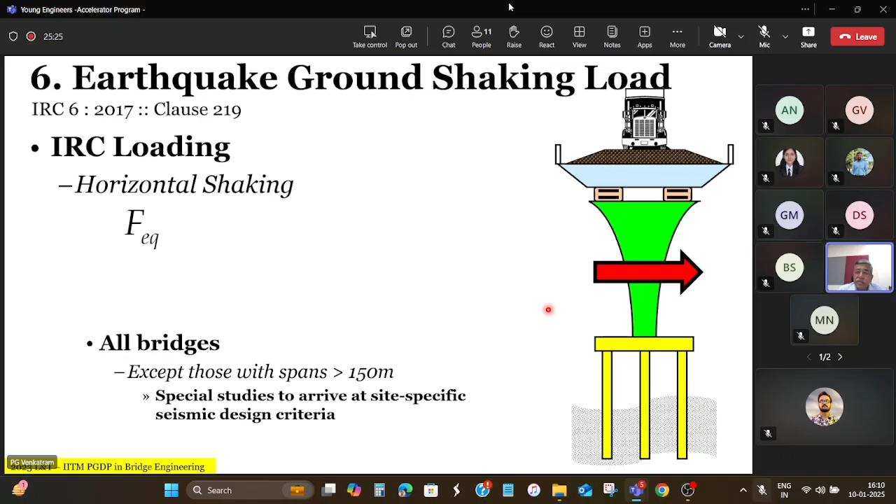I mean the relative displacement between the inertial mass of the superstructure and the foundation. It is through a structural member called the foundation, substructure, bearing, and sometimes partly superstructure itself. That whole structural member is subjected to relative displacements, and when you have relative displacement, forces will start appearing. That force is what we have decided to call FEQ.

All right, so our whole process today, as of date, stands at determining this FEQ, and we do that in a simplified fashion of calculating a horizontal acceleration coefficient or horizontal acceleration value, and we multiply it with the inertial masses, which is primarily dead load, and sometimes part of the live load.

Now, the design seismic coefficient is given by the expression Z by 2 into SA by G into I by R, in whichever form we want to combine these quantities. Z by 2 represents the design peak ground acceleration, Z represents the peak ground acceleration. I represents the importance factor for the structure. SA by G corresponds to the single degree of freedom design acceleration spectrum response value for a particular time period, the fundamental period of the structure, and R represents the response reduction factor.

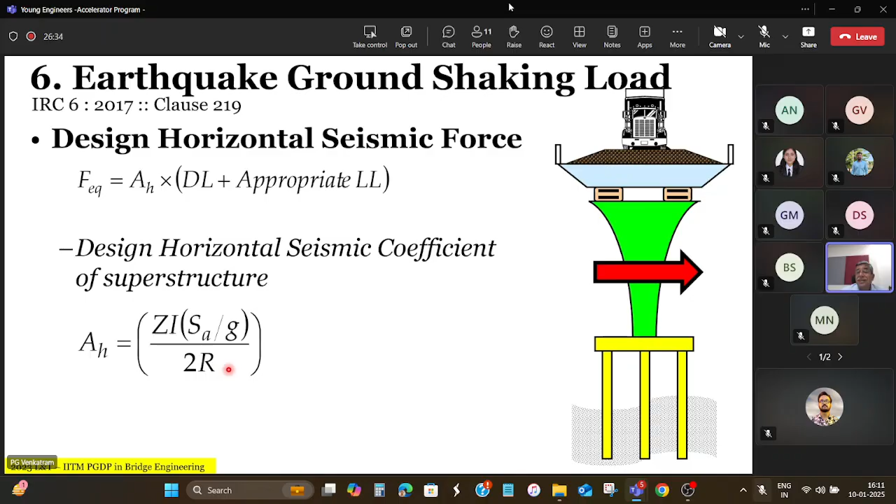We'll understand the significance a little later. What do each one of these practically mean? So the first part, let's understand the zone.

The zones or the seismic zonation basically represent the peak ground acceleration values, from zone 2 to zone 5. Earlier there used to be zone 1 to zone 5, but now zone 1 has been merged and combined into zone 2, so now we have 4 zones.

Rest assured, there's a draft version of IRC IS 1893 out in circulation for public consultation, which is changing it from zone 2 to 5, to zone 2 to 6. So there will be a zone 6, and primarily most of the changes are occurring where zone 5 is divided into 2 parts, and zone 6 is going to have a peak ground acceleration of 0.76.

76% of the inertial mass will be the horizontal force in those, and that will primarily consist of most of this Himalayan belt. I will not talk about it now, but you can locate it in the draft of 1893 under circulation for public consultation. Basically, this zone represents the peak ground acceleration as a fraction of acceleration due to gravity in the horizontal direction for a single degree of freedom system, assuming 5% as the damping.

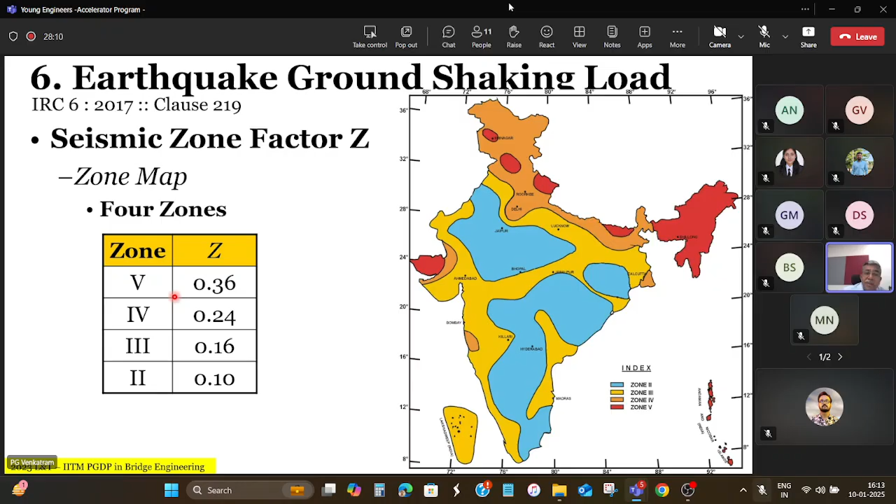Some definition is seen in the code, but the fundamental philosophy is that critical bridges are essential, very important, and therefore cannot be lost during an earthquake event — they should suffer minimal damage in the design earthquake. What this means is, imagine there is a particular region...

Say something like Delhi, which is currently classified under zone 4. In Delhi itself, you can have bridges classified as normal, important, or critical — all three are possible. They will all have the same zone factor, but the design forces for each of these structures will be different.

Normal means it can suffer significant damage. Important means it can suffer some damage. Critical means it can suffer minimal damage. Nevertheless, damage will occur in all of them. The whole idea in the design criteria is that there is no collapse, but it's the level of damage under the design earthquake that is controlled by this importance factor.

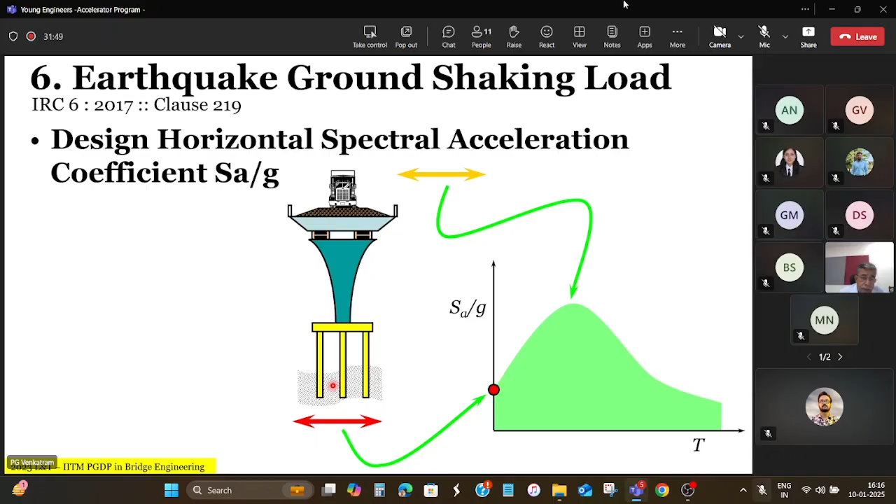Quite often in the current stage of designs, most of the time we ignore the soil, but if we do include the soil, it alters the picture dramatically. Excluding the soil, we do the modeling of the spring and come back to this value of K. In case there is significant damping, we introduce a damping model as a part — along with the stiffness, you have a damper.

What you see here is that between 30 and 60 seconds from the initiation of ground tremors, you had the peak acceleration, with acceleration peaking at as much as 0.98g. This is the ground acceleration felt at the recording station. A second recording at a different location, for the same 30 to 60 second period, had a 0.78 recording.

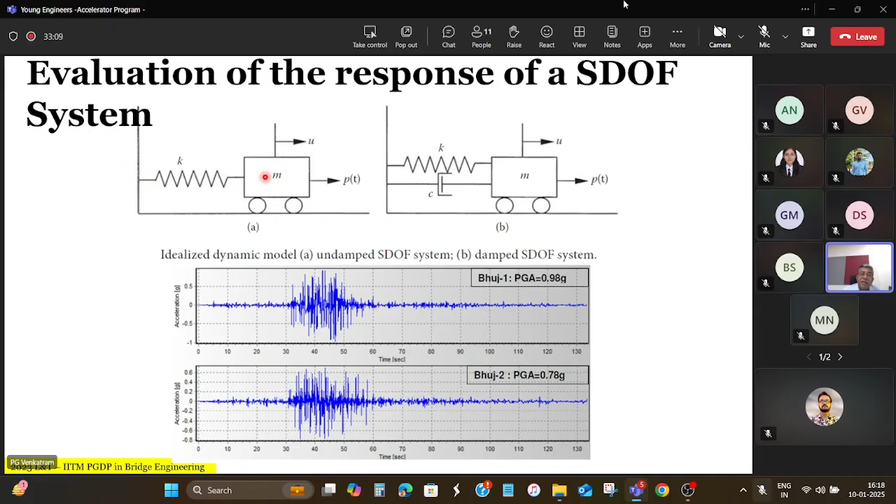So multiple earthquakes, when they happen, have multiple records. These accelerograms are put as input to the system, and we find out the acceleration response on the mass m, and then we generate what is called the displacement response spectrum, velocity response spectrum, and acceleration response spectrum.

All of them have a certain common characteristic, which is that all of them have a zone of concentrated peak acceleration. Normally we say this is how it will look, but the design value will be shown something like this, primarily because we eliminate the local peaks. If you eliminate the local peak, there's always a zone of constant acceleration response, a zone of constant velocity response, and a zone of constant displacement response. Eliminating the peaks, please understand, is important.

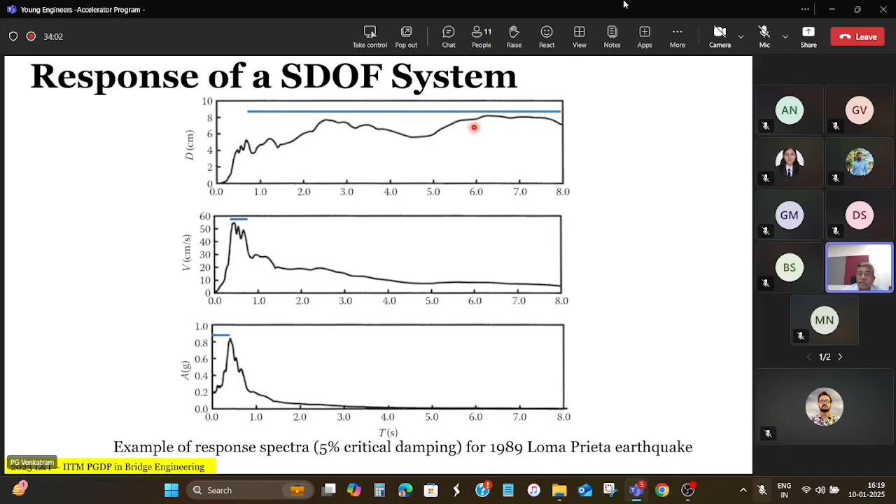So why do we do that? We basically do that because the real spectrum will be irregular in shape, because it is more or less linked to the irregularity in the appearance of the natural ground acceleration. That is, the ground acceleration is not a regular shape. It's constantly varying in fractions of a second.

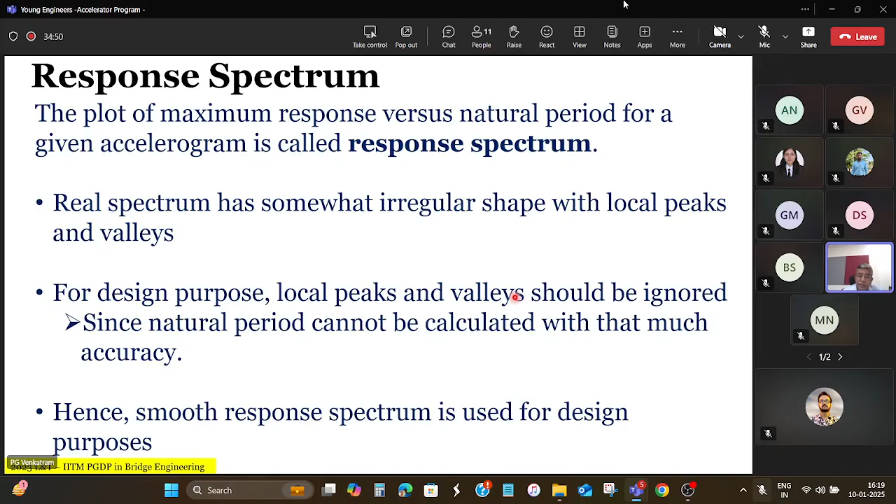And because in all these computations that we do, certain material properties and certain geometric properties are all approximate, using an approximate value and calculating the precise peaks for design purposes is a pointless exercise. Therefore, since the natural period cannot be calculated with great accuracy, we ignore the local peaks and valleys, and hence a smooth design spectrum is used for design, and that is where finally it comes to this kind of a picture.

If you go have a look at the Eurocode, you will see it. So let me see if I can share quickly with you the shape of the curve as it is defined in the Eurocode. Let me just see quickly. I think I have somewhere here on the...

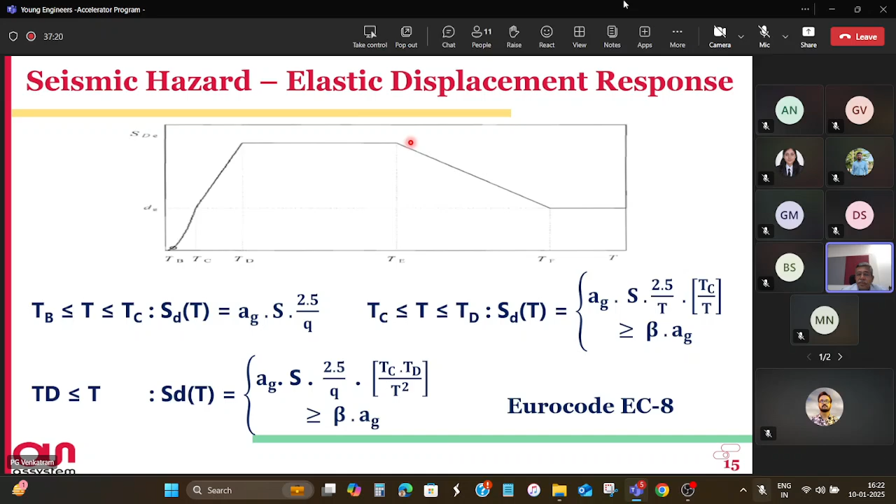Basically, it's nothing but if you do the integration of this curve, which is time constant. So if you do the second integration, if you integrate acceleration twice with respect to time, you will get displacement. And this is the constant velocity. If you recall your definition, it is proportional to 1 by t. So if you integrate it once, you will get the velocity spectrum. So you integrate 1 by t once, you get a constant value, so this becomes the spectrum of constant velocity.

And this curve, if you take a look at Eurocode, is proportional to 1 by t square. So if you take the second integral of acceleration, you will get displacement, so this becomes the zone of constant displacement. So it is possible to derive. We have decided in India, we are not yet interested in the acceleration and velocity and displacement, because we have not yet formulated our design specification for that yet, but we will get there.

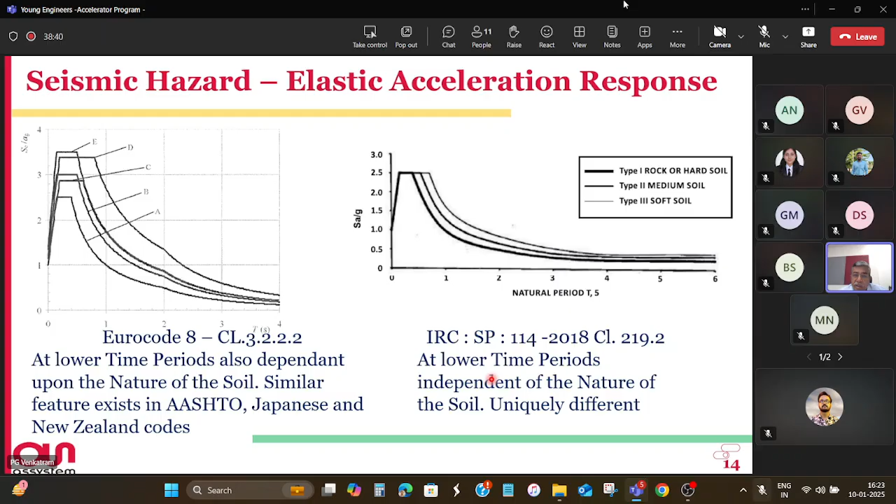Now that we have a new zone map definition, all the magnification has taken place. You will find that design is going to be more difficult with the new code in place. IRC will also have to change with that, so IRC will undergo a lot of changes once that new 1893 is published. I'm just introducing what are the changes that are likely to come. The pattern itself will change, and with that you will also have a different kind of design approach that may have to be learned and adopted.

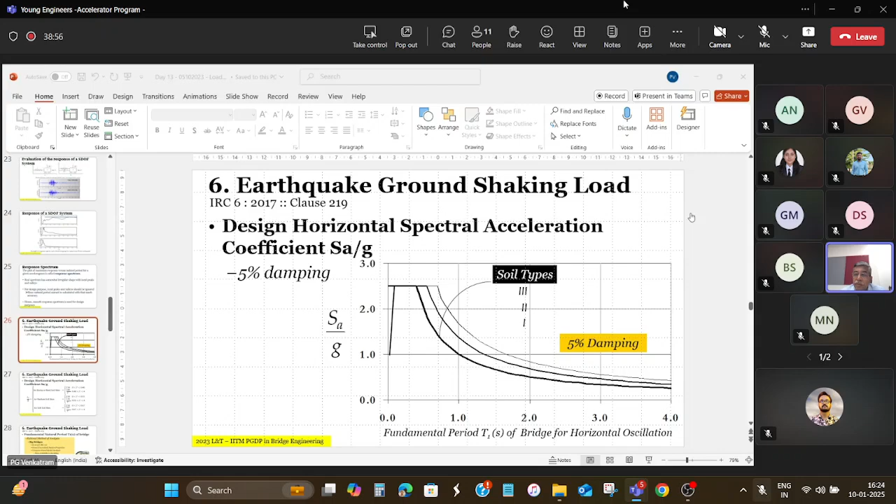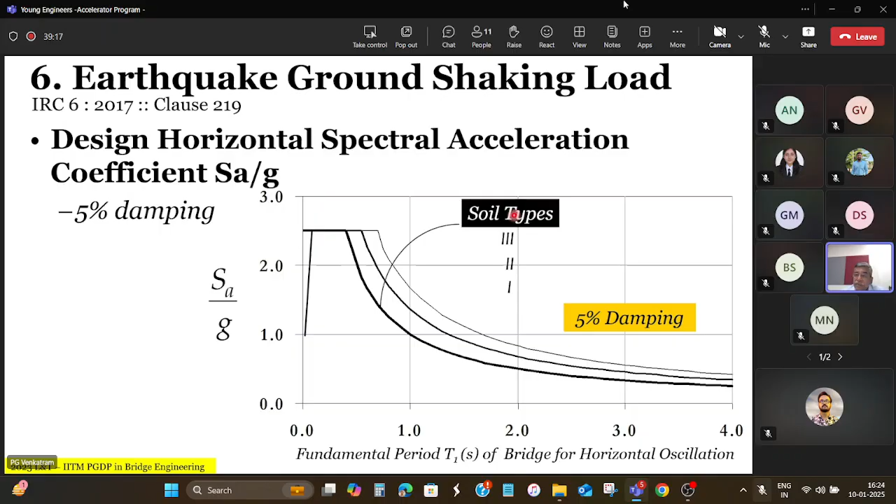Coming back to our basic understanding of the seismic displacement loading, we need this parameter, and for this we have this fundamental. If you notice, irrespective of the soil type, the peak acceleration is constant. If you recall the Eurocode, even the peak is different for different soil types. Then, if you look at the graph for the constant acceleration zone, SA by G is constant at 2.5 for all soil types.

After that, the acceleration spectrum is proportional to 1 by T. So if you integrate acceleration, what do you get? You get velocity. So if you integrate the second part of the curve, you get a constant velocity spectrum, and if you do the second integration, you get a linear one with respect to time. So the displacement spectrum will be linear in this zone.

According to current IRC, the displacement spectrum goes on increasing to infinity, which is not really the case. All the systems that we have studied and analyzed demonstrate reaching a constant. So this graph will also get changed, this definition will also change, and we will have a definition of constant displacement. The constant displacement is actually defined indirectly in our code in IRC SP 114. I will not talk about it since we are not dealing with learning in depth about earthquake design. We will look at and understand the phenomena, and be aware that these are the issues you must be aware of in time to come.

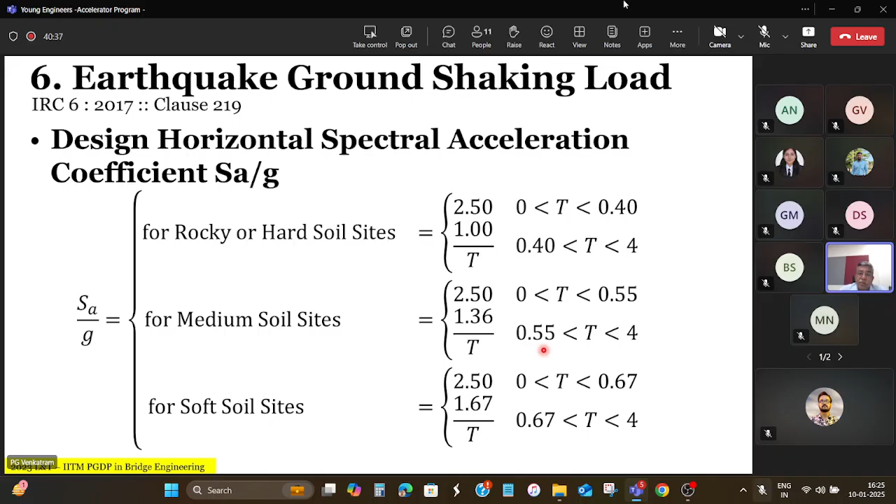After you have the fundamental natural period, that is the first period of the bridge, you can use any of the rational methods, or for small bridges, use the simple equivalent static method, which is suitable for small displacements, stiff bridges, etc. You calculate the modulus of elasticity as per concrete, use the cross section properties, and use computer based modal analysis, mass and stiffness modeling. These are all the various rational methods of analysis that we are allowed to do according to the code to arrive at the FEQ.

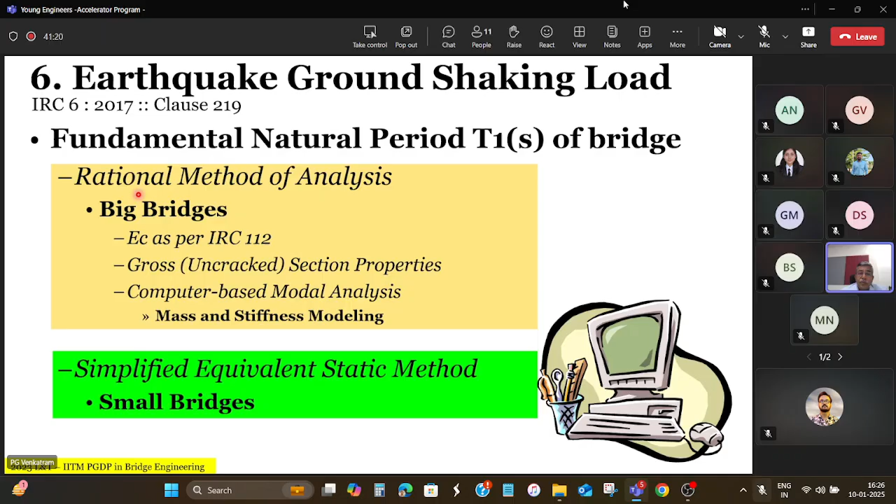Right, so after you have that, there's also a simplified equivalent static method, which is time equal to time period, first mode, equal to 2 into square root of d by 1000f, where d is the appropriate dead load in kilonewtons, and f is the force per unit displacement, that is the force required to produce 1 mm of horizontal displacement.

So if you do any static methodology to calculate this, you have a simple way of calculating this time period, and you can actually derive it from the fundamentals of structural dynamics. It's very simple, maybe sometime else, or maybe later in the slide, I may show you how this is arrived at. But remember, this is a simple method, primarily useful whenever you're using the equivalent static method. It is not suitable for any modal method or any more complex ways of analyzing the FEQ.

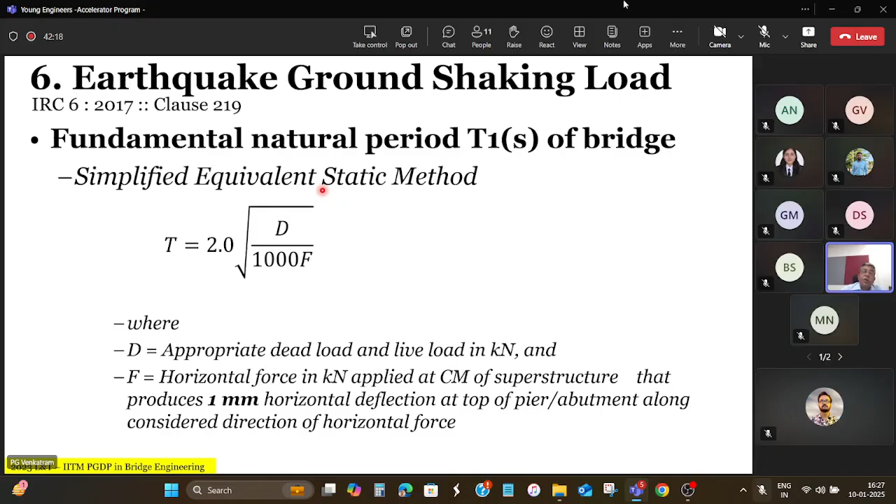The same thing, if you take a look at it in the longitudinal direction, say you have a pinned and a roller one.

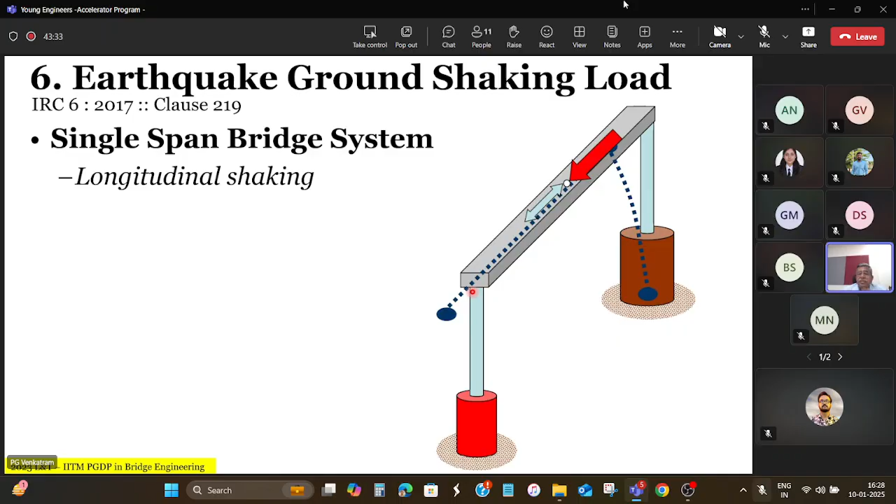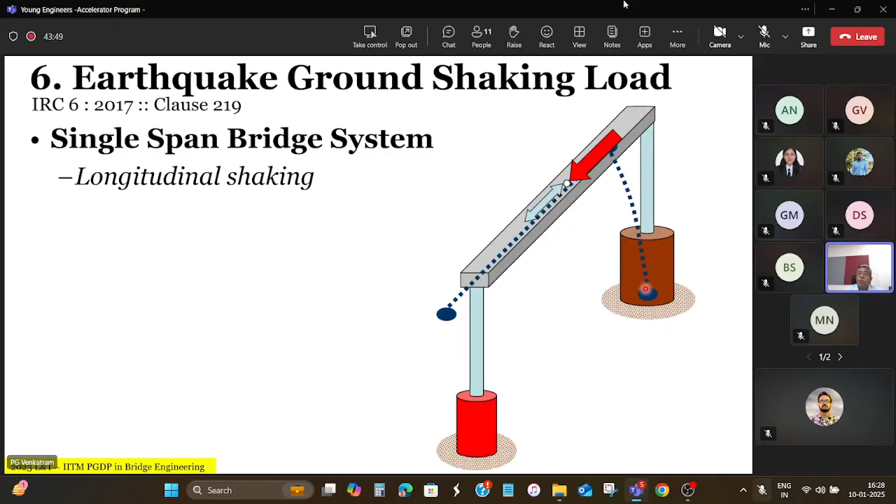When you do that, what happens is the displacement takes place in one direction, the mass moves, and all the forces appear on the so-called fixed end, and the free end will see some force primarily due to the friction at one limit, or alternatively due to the distributed mass of the substructure itself, it will see some amount of seismic response as a distributed mass. But essentially the lumped mass of the superstructure will have its inertia connected to one pier, which, as you can see here, is the pinned support.

Now, the fundamental period for equivalent static method - you go back to structural dynamics, it's simple, square root of k by m, right? And time period will be derived from that as 2 pi into square root of m by k, if this is the frequency. And then mass you substitute by weight divided by g.

And this 2 pi term, if you take a look at it divided by square root of G - a pi divided by square root of G will be approximately 1. If you recall, G is 9.807, you take the square root of that, it will be about 3.1 or so. Pi is also 3.1. They cancel out, so it simplifies into 2 into square root of D by 1000 F.

Here the units are important, don't forget the units. The time period is always in seconds, but the D has to be self-weight, not mass, because we have incorporated the acceleration due to gravity into it, and that has cancelled out this pi. And the force, since this is in force units, this is also force per unit displacement. So it has to be applied in the magnitude in terms of kilonewton per millimeter, not ton per millimeter, not kg per millimeter, but kilonewton per millimeter. That's how you have to determine it.

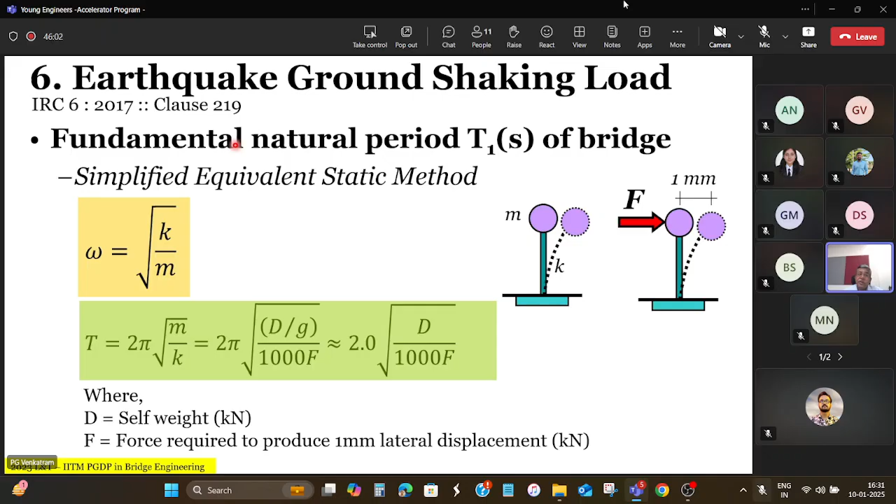Basically, using any software, you apply a force that is required, evaluate the displacement, and therefore calculate force per unit displacement. Any other mechanism is good enough for you to determine the F, and mass is known to you. So this procedure is a simple way of calculating the equivalent static method.

After having determined the FEQ, we have different components, and the different components are designed for different values of forces. So what are the forces? What are the structures we need to design? We need to design substructure, foundation, bearing, and superstructure.

Now the question comes, the response reduction factor that you see in the code is primarily to tell you where do you want to accommodate - remember, what is the problem statement for us? The problem statement is how to accommodate the relative displacement between the ground and the superstructure. So what are the components that can accommodate this relative displacement?

Which are the components? Superstructure is quite rigid. Foundation - so now comes the question, which one of them should accommodate the maximum relative deformation?

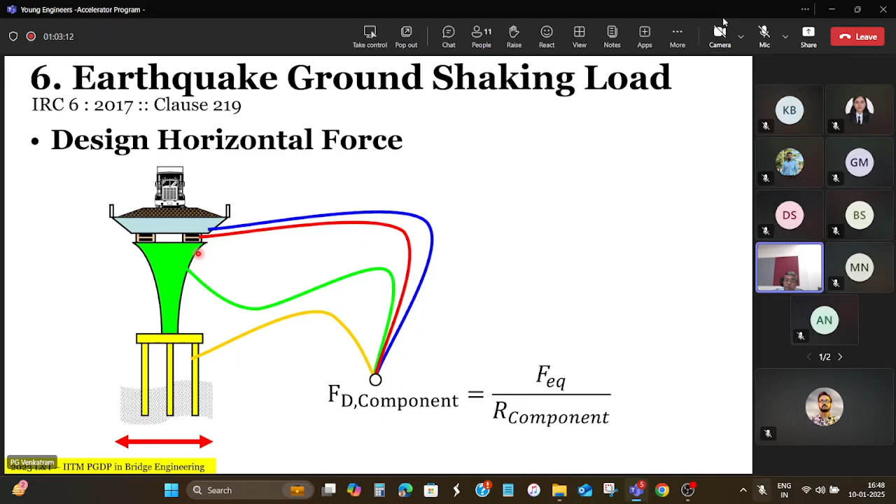So that is where there is a response reduction component by component. You will have a different response reduction. And if you take a look at IRC code, you have all these various response reduction factors depending upon the nature of the material or the type of structural arrangement. And if you notice, for all bearings and connections, it is always 1.

Okay, please understand one thing - this applies to bearing and connection in all cases, irrespective of whether you have a plastic hinge formation in the pier or whether you are using an isolation bearing type which accommodates deformation by itself. Either way, the response reduction factor is 1.

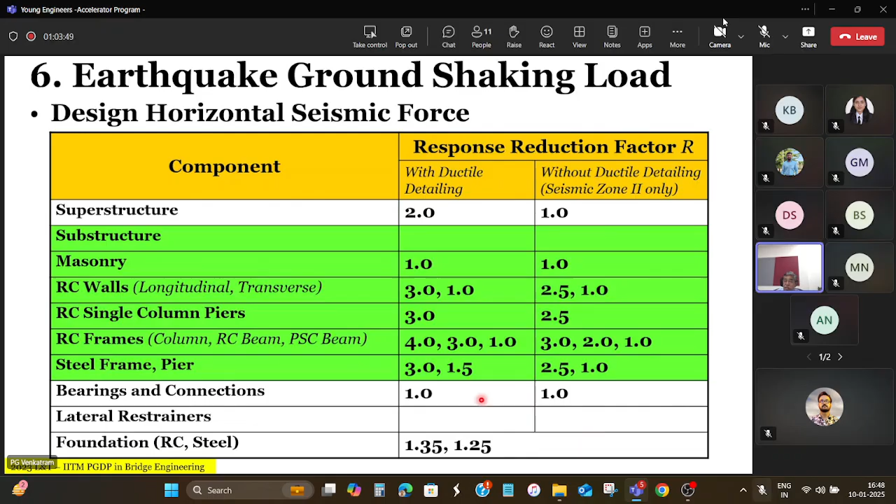Now, in the bridge design, we design for earthquake all bridges in zone 4 and 5. But in zone 4, we leave out culverts and minor bridges up to 10 meters - we don't design them for earthquake. This is one way of saying don't put the onerous conditions of earthquake design on such small structures, which can see significant damage.

But in zone 3 and 2, the exemption category is different. For culverts and minor bridges, they're definitely there, but for spans less than 15 meters and total bridge length less than 60 meters in zone 3 and 2 also, you don't need to do seismic design.

You do it for longer spans only, because these structures will be so many in number that if you start putting this onerous condition, things might become expensive and difficult. So that's a cost-benefit trade-off.

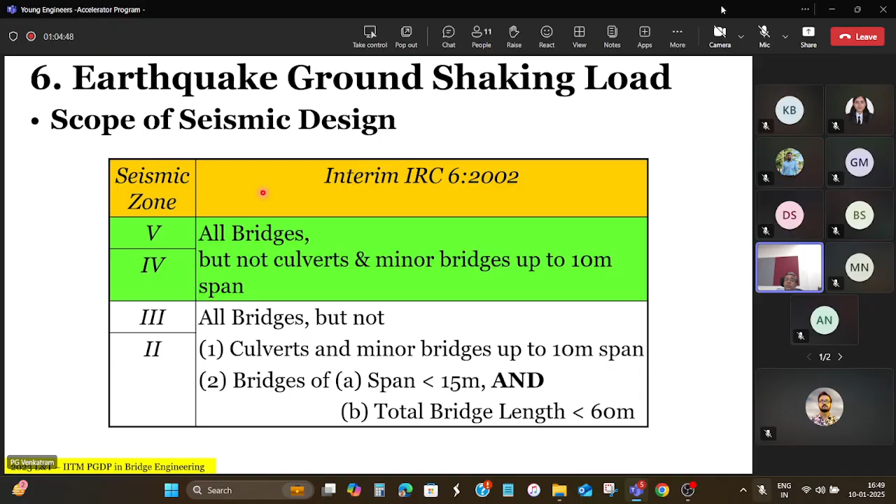Now we have seen this so far as ground shaking in the horizontal direction. However, earthquake accelerations are in all three directions, X, Y, and Z. But when it comes to the Z direction, this acceleration is transmitted through the substructure.

Superstructure has a distributed load and its own inertia. We have a simple formulation which says the design seismic vertical coefficient is taken as 2/3 of the design horizontal seismic coefficient. But remember, when you do this, the time period you take is that due to the vertical stiffness of the deck, not the lateral stiffness. Don't confuse that. The time period will be that of a beam bending in that direction, not a free cantilever as in the case of a pier. So you have to be very careful about what you understand.

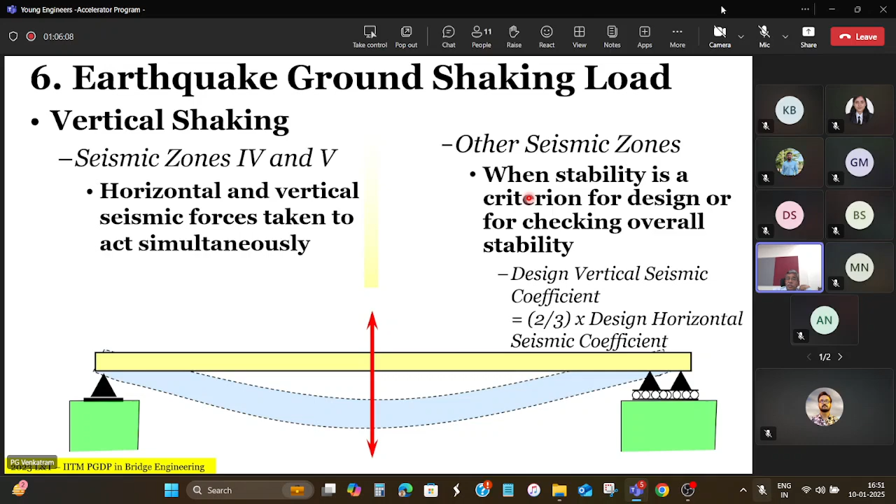With that natural period and the response spectrum, you calculate the value and take 2/3 of it for the seismic vertical coefficient, combining it with forces in the other direction for simultaneous occurrence of the multi-directional earthquake. Now we have been seeing this all from the force point of view.

One part is primarily the displacement part, but for design strength purposes, we convert it into an equivalent force and design for it. However, we cannot ignore the displacement part, which is the primary component, and it is catered for currently. If you understand, all our codes are currently written on force-based design. So the displacement aspect is addressed differently. It is not that we have ignored it in our codes, but the displacement aspect is considered in the following fashion.

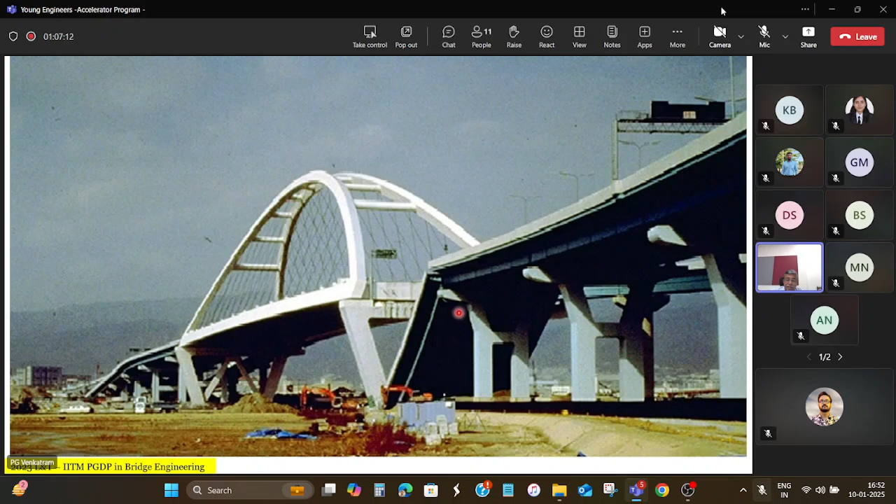So one way to arrest the displacement is to provide an anti-dislodgement device. That's not the only way. What does the code do? The code prevents dislodgement by having a seating width requirement.

This seating width requirement in our code has been reproduced from AASHTO, with its background derived from it. Basically, this is an articulation half joint. You may not see much of it, but in certain circumstances people still use this half joint. So you have one superstructure and another support or extended pier, with two different spans sitting on each other. What should be the overlapping length, n?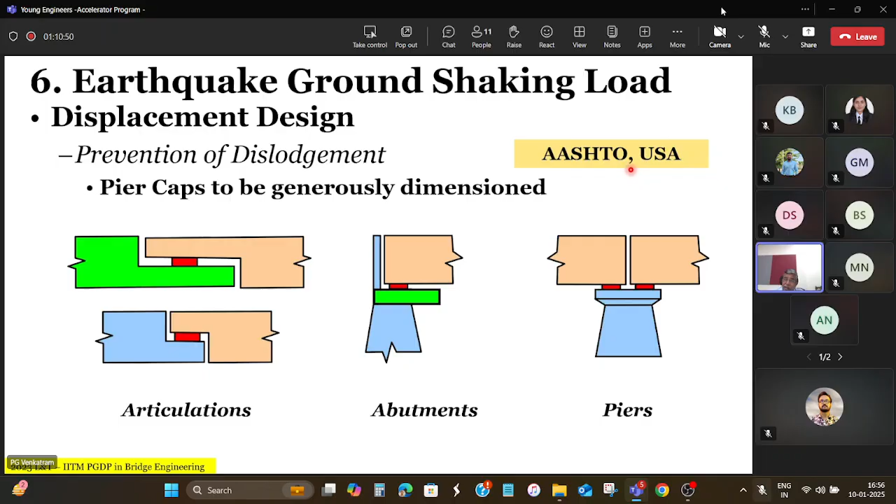This solution is also acceptable in terms of preventing displacement. Now the question comes - if you have ever read different codes, AASHTO doesn't have any prescription for anti-dislodgement arrangement. It doesn't have. It however has this prescription for the minimum seating width.

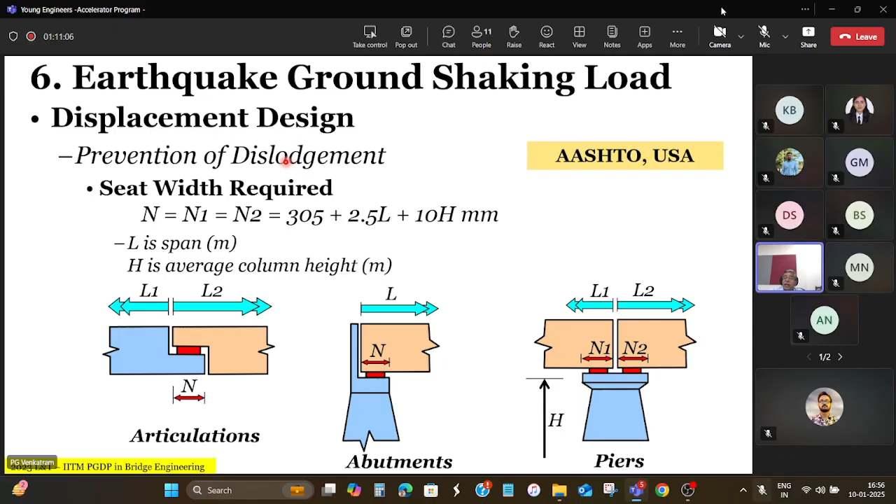What does our code do? Our code not only reproduces this seating width, in zone 4 and 5 it also wants an anti-dislodgement device, somewhat similar to this. So our code has - maybe it is the case of once bitten, multiple times shy. They have seen earthquakes in which nothing has happened to the substructure, nothing has happened to the superstructure, except that the superstructure is lying on the ground.

So therefore, they said dislodgement is a bigger phenomenon in high seismic zones, so it has to be catered for more seriously by seismic arrangement.

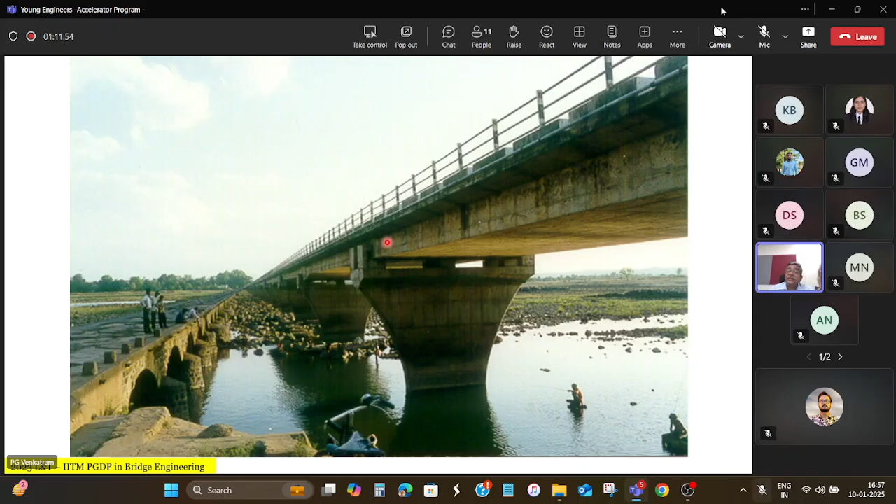So we have 2-3 things to satisfy in our code. We have to satisfy the force strength base, because we are all strength-based design. We have to satisfy the seating width requirement, which is essentially to prevent displacement-based failure. In addition, in zone 4 and 5, we have to have an additional stopper arrangement in both the longitudinal and transverse direction.

So how do we do that? We have what is called a seismic reaction block. Imagine in a longitudinal direction you have a multi-span continuous structure. It need not be structurally continuous, but for longitudinal displacement, imagine that it is continuous. And in the transverse direction, there will be restraint at every pier. So this is the normal operational condition.

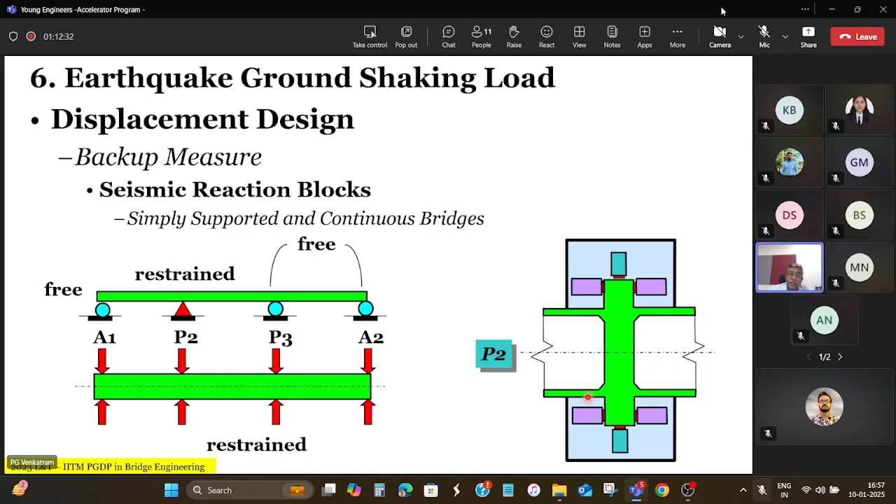Now, what backup measures do we need? We need to make sure we have an anti-dislodgement device. How do we achieve it? On the fixed pier, you introduce these purple-like stoppers, which essentially prevent the longitudinal displacement.

And in the transverse direction, you introduce this dark blue kind of arrangement in the fixed pier, so that it prevents the transverse displacement, in spite of the fact that your bearing articulation might already be preventing that. So in zone 4 and 5, you need to make this additional provision.

And if you take a look at the other piers, the so-called free piers, they don't have the longitudinal stoppers. They only have the transverse stoppers, in addition to whatever provisions you have made in the bearing.

This is the case for zone 4 and 5. In zones 1, 2, and 3, you may - I don't remember exactly, maybe zone 3 also requires you to provide this. I don't recall, but you can refer to IRC 114, SP 114, it will tell you whether zone 4 or 3 also requires you to have this additional stopper.

So this is how we take care of it - see, our basic phenomenon is displacement, but we design for force. The displacement phenomenon we have not ignored. We have not given any design rules for how to handle the displacement in our code, but we have given detailing rules on how to prevent the adverse effect of significant displacement, in the form of seating dimension and provision of

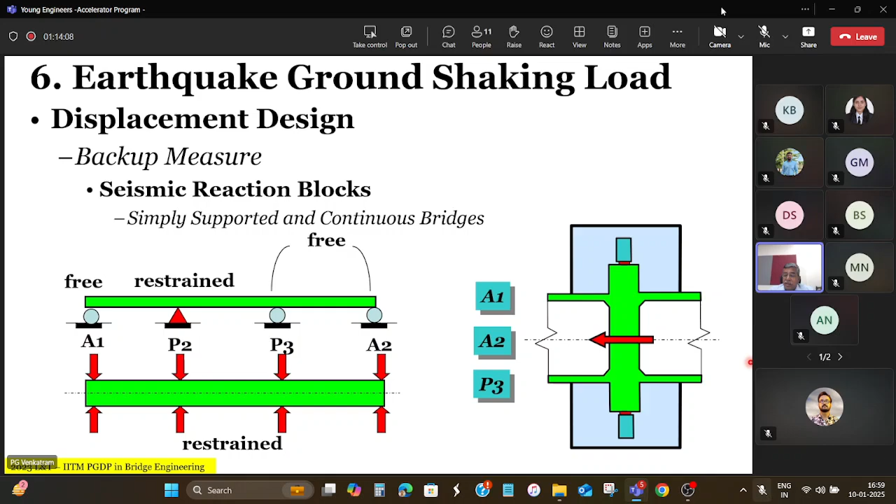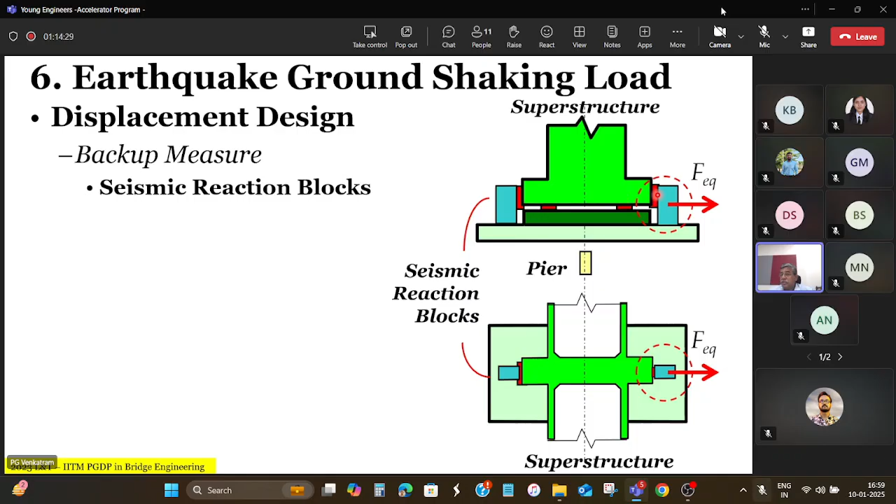seismic restrainer blocks - seismic reaction blocks - detailed out mostly in the transverse direction. As you can see, there's simply a corbel-like projection around the superstructure, so that any lateral displacement is within a controlled amount, beyond which the stopper will engage. That is the typical arrangement in the transverse direction.

So with this, we are through with the basic understanding of seismic effects as loads. Next, we will start understanding the concept of characteristic loads and the way in which it differs for different types of loads, in the coming Friday.